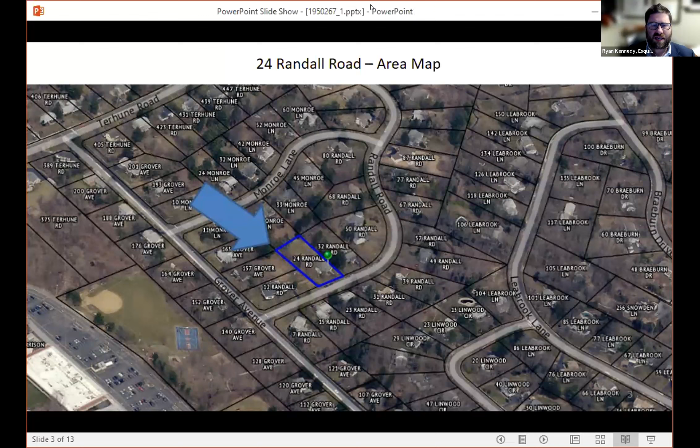Next, if we move to the next slide, this is a neighborhood map, also with the property highlighted in blue there. Correct. Next slide, this is the tax map showing the former township's R-5T zone, is that correct, showing the property? That is correct. This is the zoning map with the property shown.

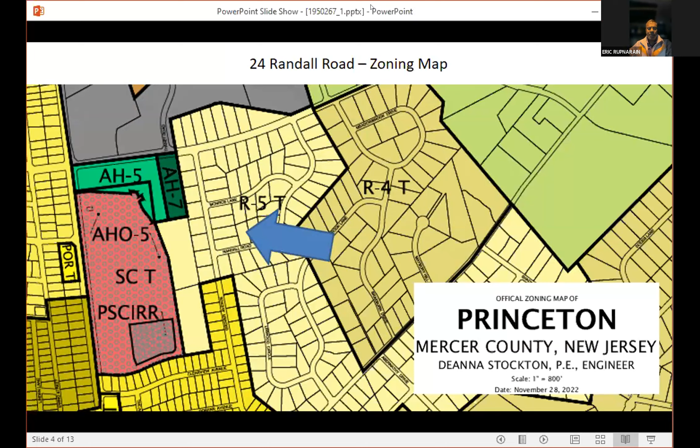Okay, now this next slide, this is a clip of the bulk table from your plans. Is that right, Eric? Yes, it is. Is it correct that this project and lot complies with all the bulk requirements except for lot area? Correct. In the township's R-5T zone, 21,780 square feet is required, and the existing lot, based on the survey my office completed, is 21,702 square feet. So the applicant is 78 square feet short of a fully compliant lot in terms of lot area.

Otherwise, all of the other bulk standards are met. And so 21,780, that's a half acre, is that right?

Yes, it is. And is it also true that if you looked at the tax records for most of the lots in the neighborhood, including this one, it lists a half acre, and someone might actually think it's a half acre when purchasing it? That's correct. I mean, for all intents and purposes, it's a half acre property.

Before we leave this slide of all the other compliant bulk features for the house being proposed and the lot, on the bottom right, 17.6% is the impervious coverage that's proposed, so we're less than half of what would be permitted on this lot with the proposal. Is that correct? That's correct. 36% is permitted in the zone, and the applicant is only proposing 17.5 or 17.6%.

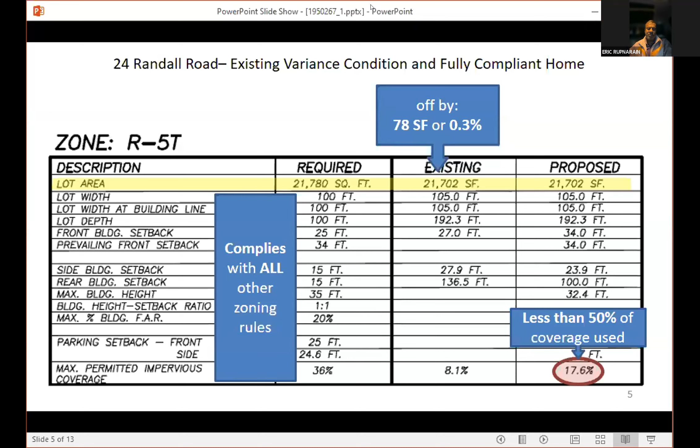This next slide, tell me, the lots highlighted in blue, are those all the lots that the tax records indicate are exactly 1/2 acre, including our lot? That's correct. And the red lots are all of the lots in the neighborhood that are less than the half acre requirement, is that correct?

Correct. So I know you tend to draw these types of plans, and this subdivision's been here for a while, but in your mind, is this sometimes a rounding error, or was something thought out here when this was put together, or perhaps just a mistake?

No, I think normally when you look at most tax maps and most older subdivision plats, typically the lot areas, when listed in acreage, might go to 1 decimal place, perhaps 2 decimal places. And if this property was rounded essentially to 1 decimal place, it rounds to 1/2 of an acre. That's what I've seen in many different places, in many different municipalities. Normally they do not list lot area in terms of square footage. The newer tax maps would have that information, but older plats or older maps generally do not.

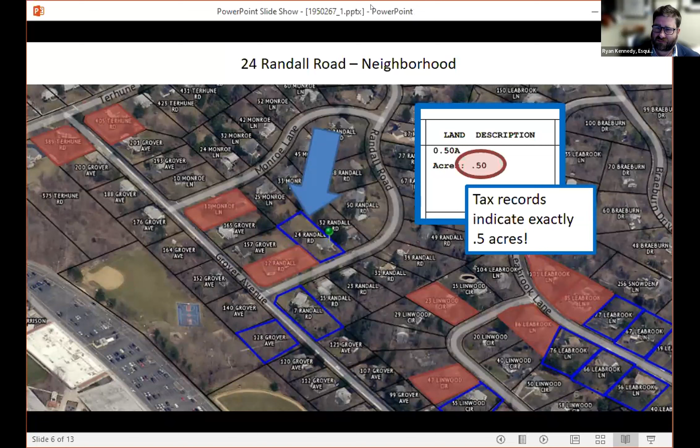So as always is the case, and as suggested by Mr. Bridger, we did, and highlighted in yellow are the lots adjacent to ours that have perhaps slightly more property, or this one has slightly less. And to the extent we haven't already, these are redacted copies of the letters we sent to them seeking to purchase their properties, and no one has been interested, as is often the case here.

Mr. Kennedy, they're redacted on the screen, but you're saying the originals or copies have been submitted to the board secretary? That's correct, and to the extent they haven't, we will as well. But yes, I believe we did before the meeting last month.

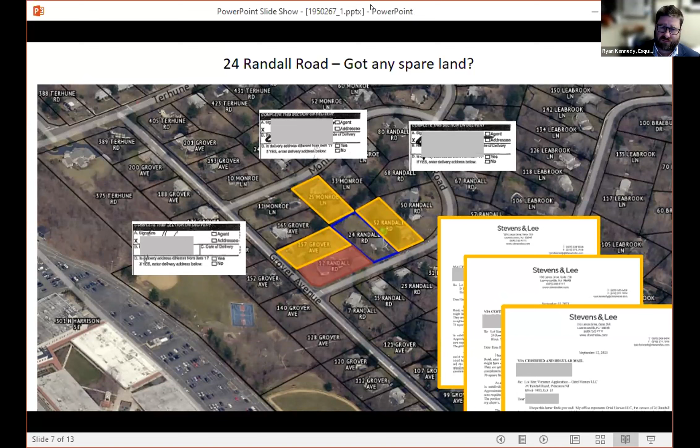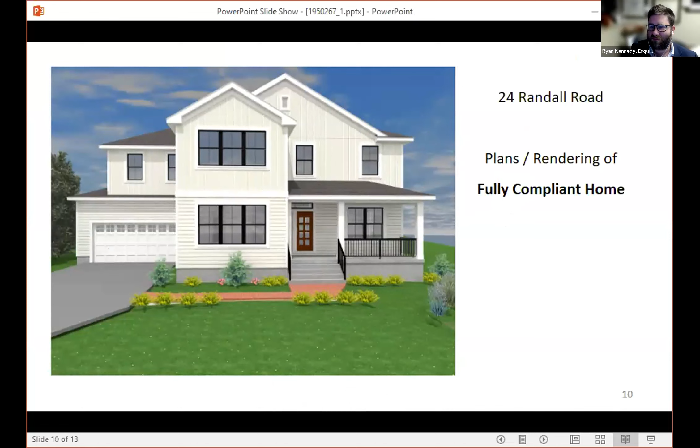Got it, thank you. This next slide is a rendering of the proposed home. Yes it is. And the next one, I'm just going to ask you to identify, but these are the floor plans that were proposed for the home. Do you understand them? I know you didn't prepare them, but you're familiar with them, and that's what we're looking at here.

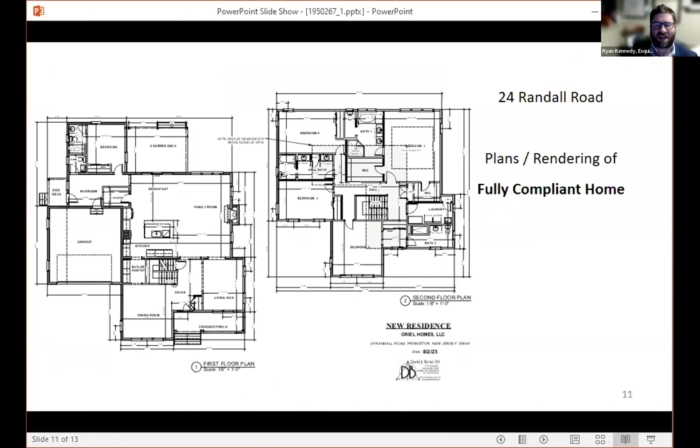All right, well, thank you, Eric. Before we go to our arborist, I'd be happy to have our engineer answer any questions that the board or your professionals or anyone may have.

One question: is there a basement in the house? Yes, there is. Are you planning on opening it to grade in the back? No, the back of the property is higher than the front. So the basement will not be a walkout basement. Okay, thank you. You're welcome.

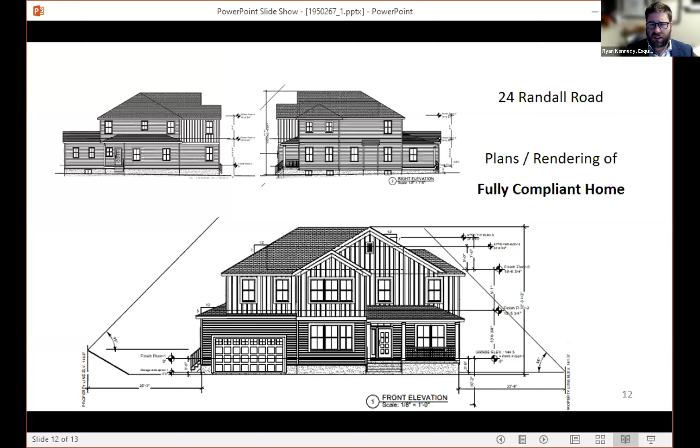Thank you, Eric. I guess if there's no other questions, I'd like to move to Corey, our arborist, next, and I'm going to shift back a few slides while I do that. Corey, thank you for joining us tonight.

If you could briefly explain to the board what you do and your involvement with this project. I work as a sales consultant, certified international arborist for Princeton Tree Care, where we do disease diagnosis on trees, tree treatment, tree rejuvenation, tree restoration, tree root barrier protection, and tree planting. We commonly work in Princeton, Hopewell, and all the surrounding towns. I've been in the industry for about 12 years now.

Thank you. Mr. Chairman, I'd like to have Corey accepted as an expert in tree management, as an arborist. That's fine. Thank you. So Corey, briefly, I know you've been to the site and looked at this, and perhaps just to foreshadow what the board may possibly hear...

But there are a series of trees along the right side of this property. I don't know if you can see my mouse here, but I want to just describe those briefly and say what's there at the site.

It's an older row of spruce trees, roughly about 50 to 75 years old. I don't have the exact diameter breast height of each of them, but they're pretty evenly spaced. I'd say they all max out at around 68 to 75 feet, and they are in moderately, in great condition.

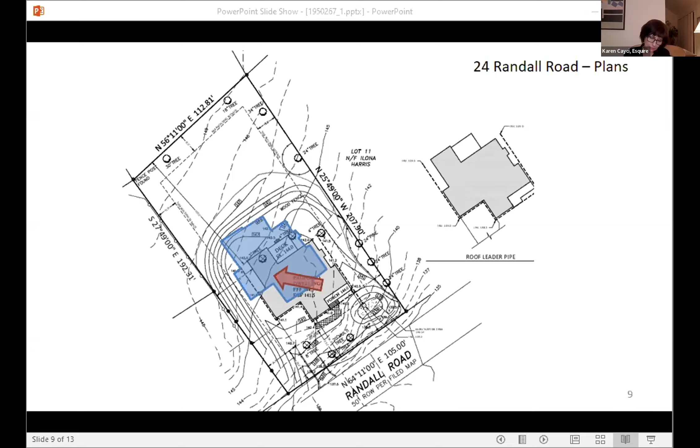Board members, any questions before we go to the public portion of the hearing? Mr. Kennedy, you want to say anything else before we open this up to the public? No, thank you so much. Okay, hearing none, we'll open it up to the public.

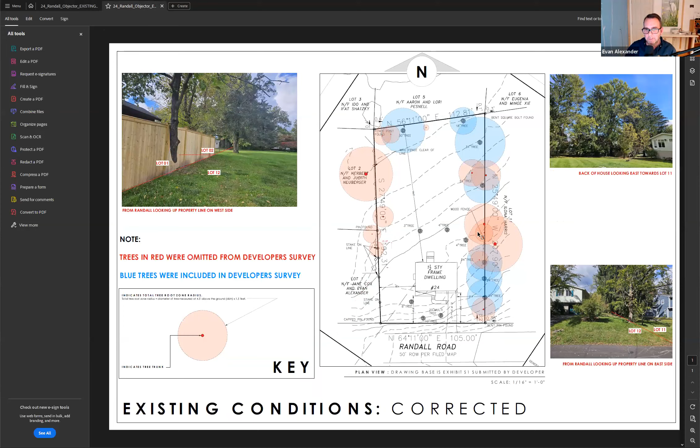So I took the developer's drawing, made sure it was to scale. I measured the existing trees on site and then overlaid them onto the existing developer plan. I have two versions of this: one shows the current house as it is, the existing property that's on there right now. This is the drawing from the existing, and you can see the grade changes as they exist. The other drawing shows the proposed grade changes around the perimeter and backside of the proposed house, and how this impacts existing trees.

All righty, so we can mark this objector exhibits 1 and 2. Does the board want to accept this, since you've heard testimony now from Mr. Alexander? Well, this is the first time we've seen it, so it's hard to accept or not accept it without review.

I would ask the owner applicant to respond to this. Do you want to go through all the objector testimony first, because I believe there are other comments still to be made? We can do that. Let's do that and then we'll discuss them.

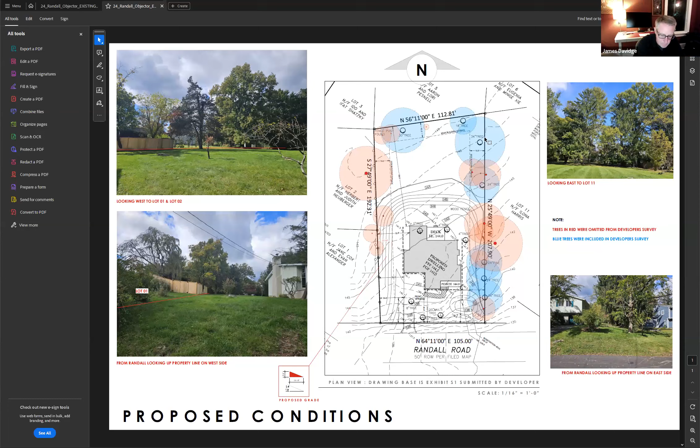Mr. Alexander, did you want to add anything else? I think that's all I have to say. Thank you for your time, everybody.

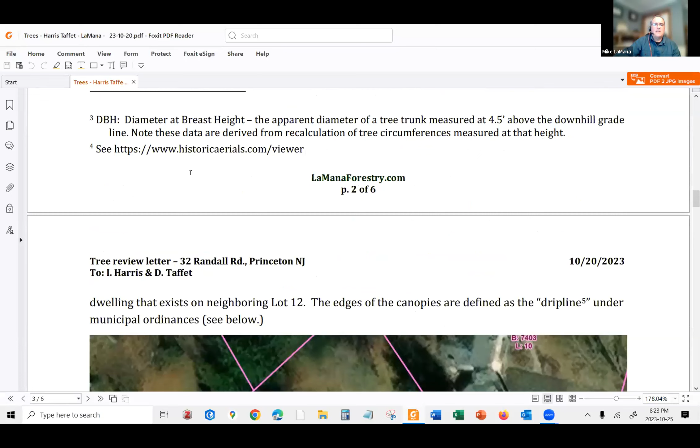What I did was I plotted these trees, and this is all approximate. This was all just off tax assessor tax maps or so. I plotted them approximately, and I looked at the 5 that were most likely to be impinged upon by the proposed activity. This photograph is publicly available aerial imagery from 2018, if I recall. Property lines are just tax lines, they are not survey lines. That's not the point, it's just a schematic documentation.

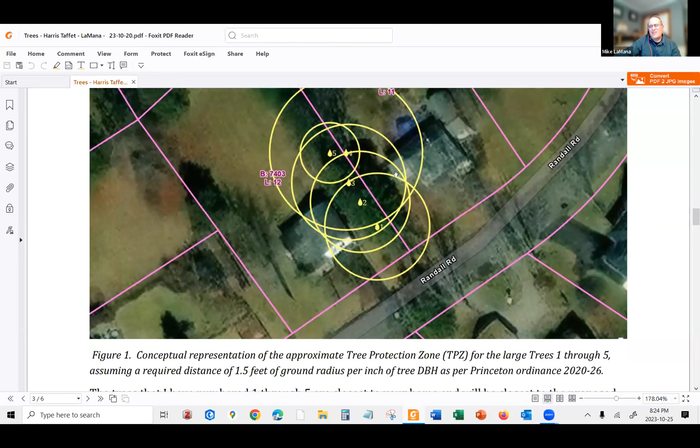So here on this photograph, what you see is the spread of these trees. These are the trees at issue. And frankly, they get, and there's a shadow effect, but they get very close to the existing house on the subject property here, and not so close to the Taffet Harris house over here. The issue is that this line of trees are all uphill of the Taffet home, which is slightly downhill.

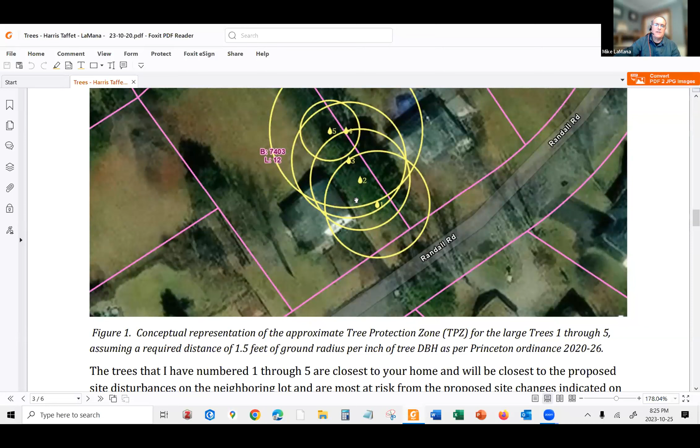So one of my concerns here is that root disturbance on this side, whether that be loss from compaction or the cutting of the roots, is going to destabilize, or is reasonably likely to destabilize, the trees, making them more likely to fail, possibly more likely to fall over in the direction of the Taffet home, this sort of thing. And we know this happens, and that's why specifically things like tree protection zones are called out in the municipal ordinance, which is frankly a pretty good ordinance.

So what I found, just to sum this up pretty quickly, what I found and concluded was that these trees appear to occur within 25 feet of the existing home on the proposed lot. So essentially most of the root zone of the trees that would almost certainly be protected under a reasonable application of the municipal tree protection zone rule itself is going to have to be impacted in some way by the construction of the house and the deconstruction of the present house or so.

So the applicant's presentation, whereby they would consider moving the house away from some of these existing trees to more thoughtfully try to preserve them, I think that's a wonderful step.

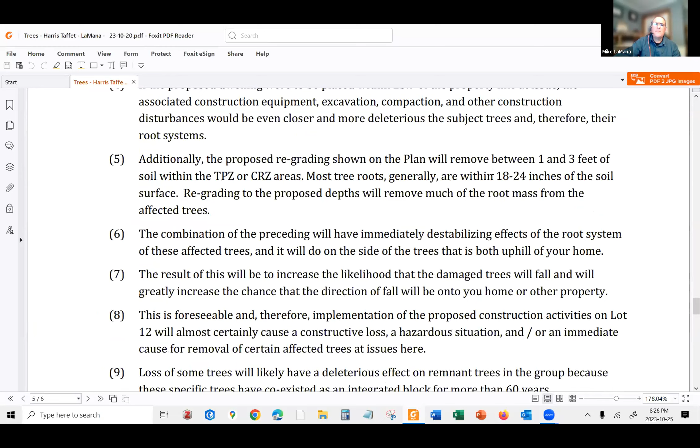The other thing that concerns me even more is the amount of grading. As Mr. Alexander pointed out, we're looking at anywhere from 1 to 3, possibly 4 feet of cuts and fills, which derives from the stormwater rules requiring a retention basin. I can't speak to those engineering issues, but I can say that if we do cuts and fills of 1 to 3 feet in depth on a line of maturing spruce trees, every arborist would agree that's going to have a deleterious effect on these trees. So my concern about maintaining these trees is now driven as much by the regrading, the stormwater basin, and the proposed rain garden as it is by the position and method by which the house is going to be built.

Without being any more long-winded, I'll ask the board if you have any questions of me. I don't have questions of you. Board members, do you have questions? Okay, we have none.

I do have a question, I asked earlier but hadn't unmuted myself. Are there 12 trees that were not on the original plan that you've identified? 10 or 12, how many? I apologize that I can't answer that directly because I only looked at the one property line. I found 10 trees existing from front to back on the property line I was engaged to look at. I think Mr. Alexander might speak more clearly about that, since he went out and looked at the entirety of the property perimeter.

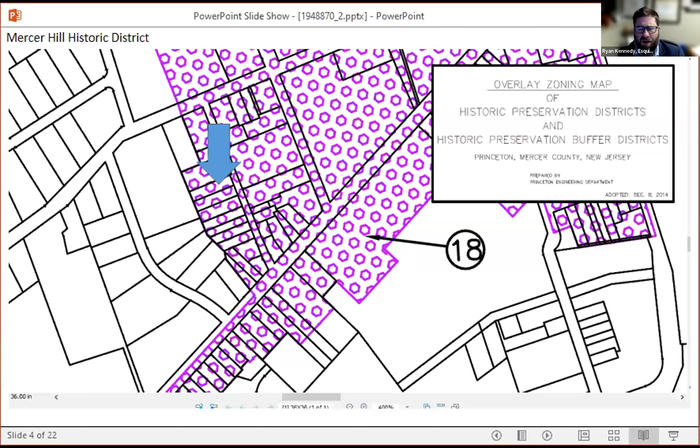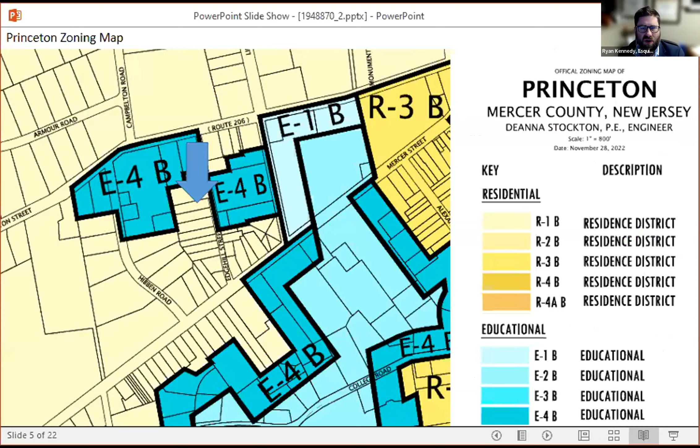Here's a zoomed in version showing our side of the street. This next map shows the Mercer Hill Historic District overlay that we are subject to. This type of district, as Elizabeth said in a report, is one of the types where the concern is what's visible from a public right of way. And then Jeff, this is the zoning map, kind of showing whether it's Swiss cheese or kind of a hockey player smile of mixed educational and residential zoning in this area, but ultimately we're in the residential zone here. Is that correct? Yes.

Okay, so first I guess we want to try to explain the additions that we're talking about, maybe starting with the rear addition. So maybe walk the board through what we're looking at here. Yeah, so the shaded area that the blue arrow is pointing to is the approximately 10-foot by 20-foot addition off the rear of the building, which will house the new kitchen. And this addition actually respects the side yard setbacks. It's stepped back enough that it doesn't itself require a setback variance. Okay, and it has a second floor addition over the top of that, which will be the master suite.

Got it. Now, while we're here, just to save us a little bit of time later, on the bottom right, this is the side facade of the proposed condition. There's some windows here, and this might be a good time to talk about the windows that we've discussed with HPC. On the left main side of the house, I believe, is a previously shuttered or boarded up window that's being restored and opened. Is that right? That's correct. And then on the top right, this is the window that HPC recommended and we agreed to, not removing but keeping in place and shuttering, almost like the one previously had been done on the front. Is that correct? That's correct.

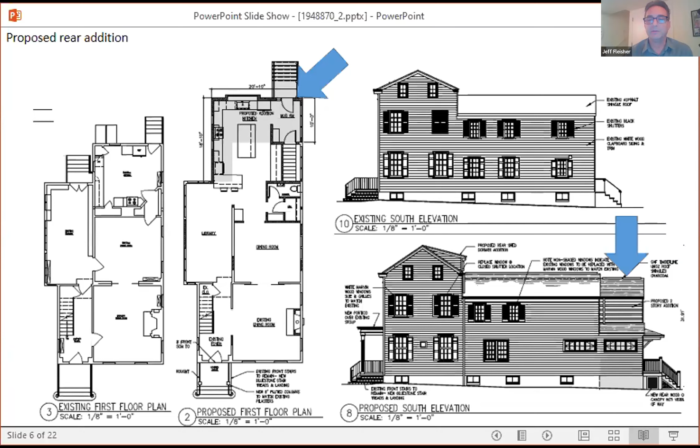All right, and then I guess next, these are the kind of ganged windows in the new addition that HPC talked about. Can you talk a little bit about why we feel those are kind of necessary in this configuration, and what's behind there that is not compatible with the original window location? Yeah, the first set of 3 windows would be in the stairwell leading to the basement, and the second set of 3 would actually be the high windows in the mudroom. So I guess the idea there is to let some light in and have it not interfere with the stairs or a neighbor. Now, in your view from the street, is there really any way, are those visible? You'll never have a full-on view from the street of those windows.

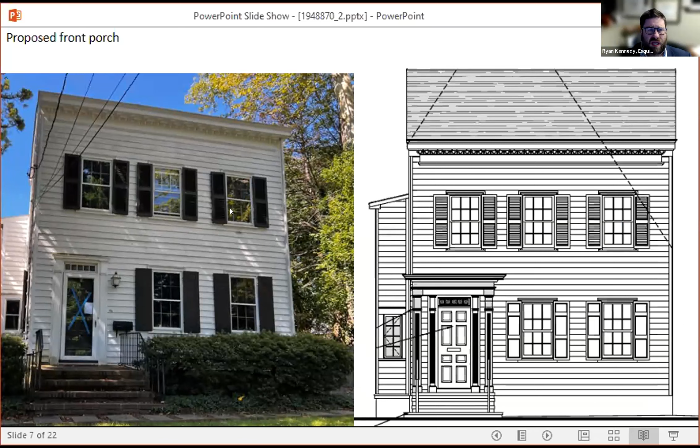Yeah, the next element that we're talking about is the front facade here. So you've got the existing photo of it and the proposed.

Right. So we were going to maintain the existing stairs, but we were going to replace the brick with bluestone. We're going to maintain the wrought iron handrails. And we were also going to mimic the pilasters that were on either side of the door. I believe HPC agreed that we could add sidelights on either side of the door, pushing those pilasters out to the very edge. And then there was talk about they didn't feel that the fluted columns were appropriate, so we were going to remove that detail from the columns.

And that's something the applicant is certainly willing to do. Is that right? Yes. And as far as the side light goes, something we'd be willing to, if HPC staff was willing to work with us, we'd be happy to work out something they found satisfactory, with the narrow side lights that they discussed. Is that right? That's correct. Yes. Okay.

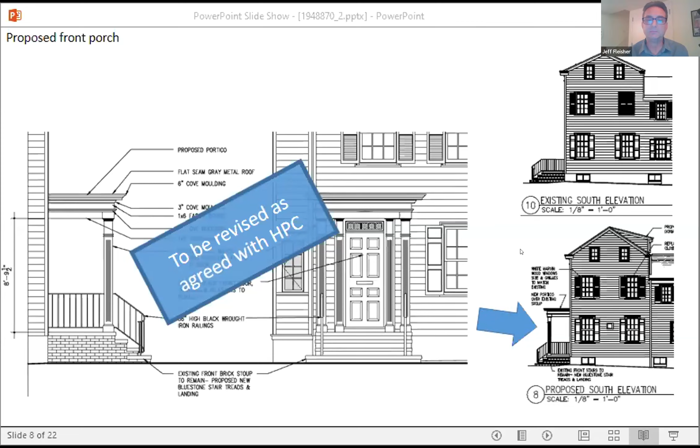Okay, so the gutter line will remain where it is. We're just raising the pitch of the roof itself. And the pitch right now is extremely shallow. Yes, it's like 5 on 12, and we're proposing to raise it to 8 on 12.

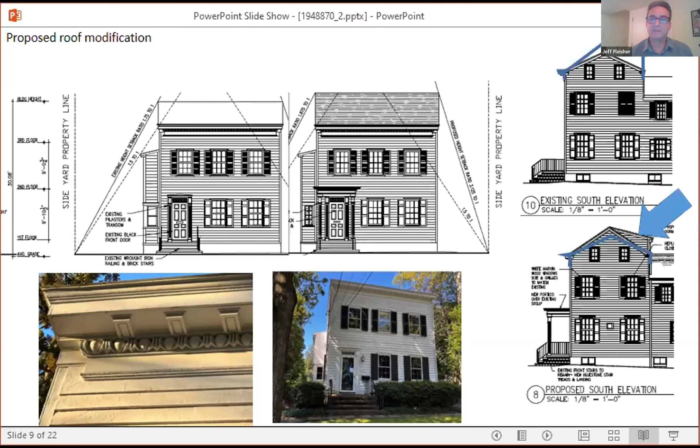And the profiles on the right show an overlay of the proposed rear-facing shed dormer to get a little bit of headroom in the attic, and an overlay showing the slight difference in the roof line that's proposed. And what type of room would that be up there? I think it's intended to be a study or home office.

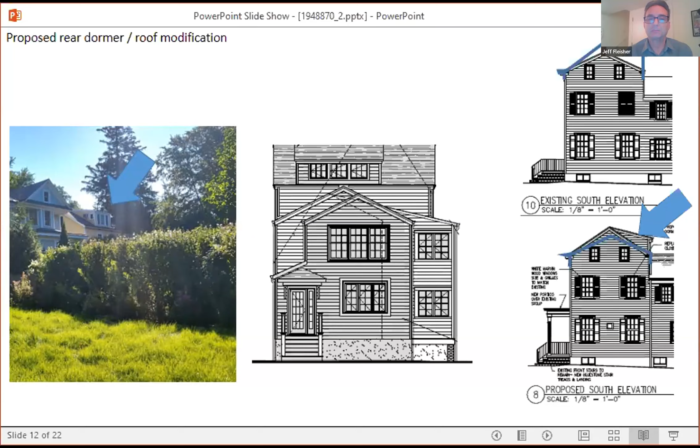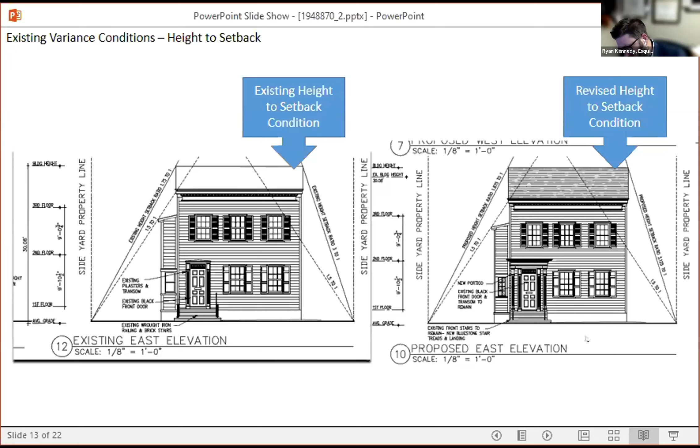Under neighborhood character, there is some understanding and relief for things projecting into side yards and height to setback ratios. Unfortunately, the dormer part, while it's not really on that side, the rules were meant to cover dormers facing a side, and the math just doesn't work, so there's no relief for that particular dormer. These things have been thought about, maybe not perfectly, but these small changes still do require the setback variance.

Before I get to the slide, there's one piece we could show here. This is the left side of the home. One of HPC's recommendations was that rather than replace this window in kind, it be replaced with two double hung windows that might match the other side. We asked the board, and we've since looked at the costs of doing that. We initially thought it would be less money to buy this complicated window than to do these, but it turned out reframing the attic and putting in new window framing was actually quite a bit of work, and we'd like to replace essentially in kind what is there now.

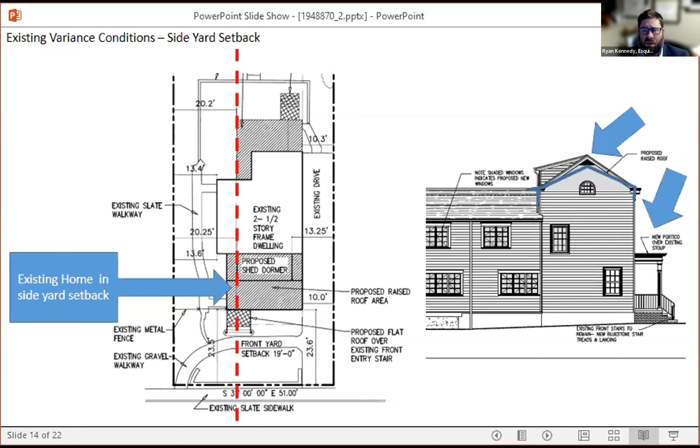So with that, happy to have our architect or our homeowners available to answer any questions.

Board members, any questions? The owner, the architect? Okay. If there are no questions, we'll open this up to the public.

Mr. Kennedy, do you want to say something before we open it to the public? No, just again, thank you all for your consideration and time tonight. I know it's always a struggle to deal with these tiny lots, and I just hope you agree that this dormer treatment, the slight change to the front, and the addition on the back is again a tasteful way to adapt one of these homes for modern use.

Thank you. Thank you. Okay, at this time we'll open this meeting to the public. Claudia, has anybody indicated they'd like to speak? I think Elizabeth wants to speak.

Elizabeth? Yes, Elizabeth? Oh, thank you, Mr. Chairman. I mean, I can wait until the public, but I just had some comments to address.